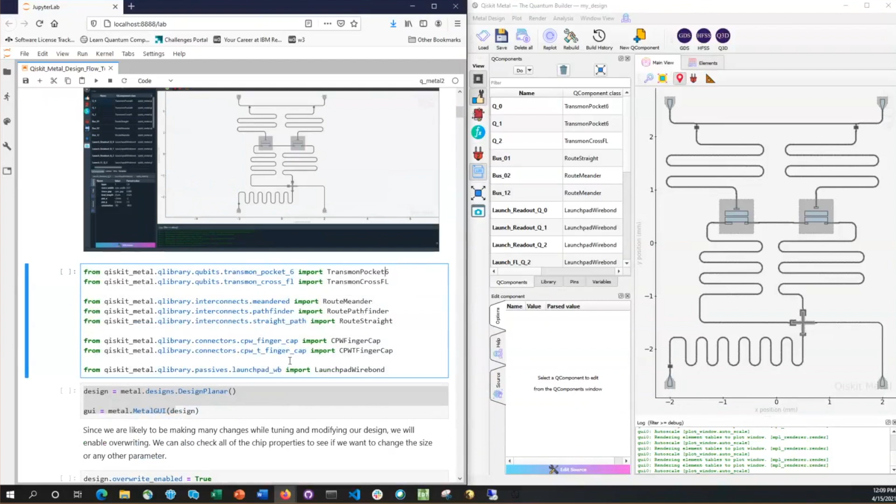So, we had generated our chip layout using a number of components. You can see the final product on this right-hand side of the screen in the GUI and an image captured in the notebook there. It's a combination of transmon pockets, crosses, pathfinder routings, transmission lines, some capacitive couplers, and a wire bond launcher.

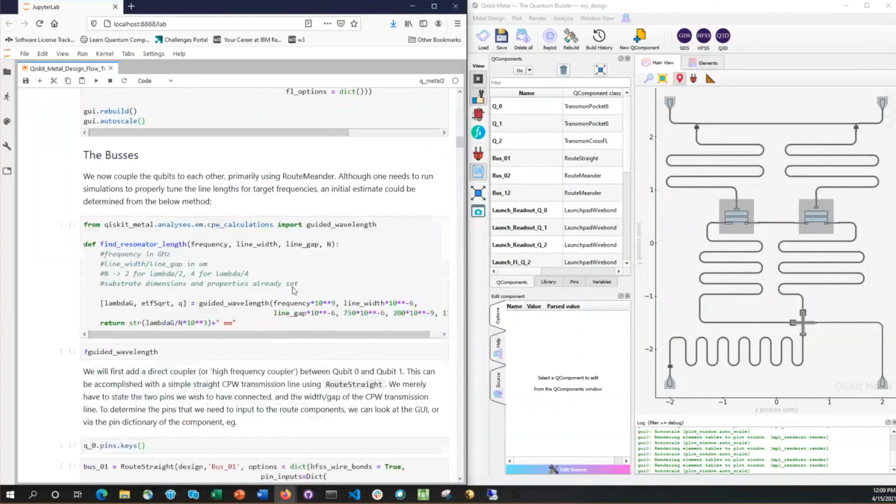So we decided what would be good initial options and parameters for setting our target quantum values that we were after, such as what kind of G did we want, what kind of readout chi did we want. Of course, these were just kind of educated guesses because to hit those specific values, you have to end up doing some kind of simulation and analysis to figure out what your layout is actually translating to. So once we had the buses with our estimated lengths, and finally all of the readout section, we were able to start getting to the simulation and analysis.

So we started off doing the LOM on a single qubit. We first were just focusing on qubit 0 over on the left-hand side here. And we were able to run it through the LOM analysis, specifically focusing on a few of those key values, such as what the qubit anharmonicity was, what's the coupling to the bus resonators, and what the readout chi would end up being. So after doing our initial simulation, we saw that none of the values were what we were wanting. We wanted a chi of a megahertz. We wanted the G to be about 80 megahertz. So we needed to make some changes to our qubit.

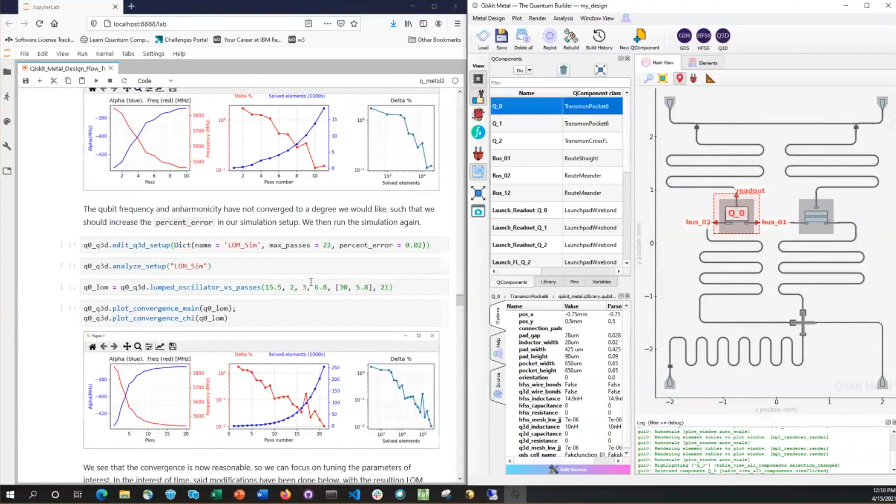So we were able to go through, improve the convergence of our simulation to make sure that we're getting good results. And once there, make the necessary modifications to our layout so that we could get the actual simulation results to show that the modifications we made to the layout were allowing us to hit the quantum parameters that we were interested in, that you can see highlighted in yellow here.

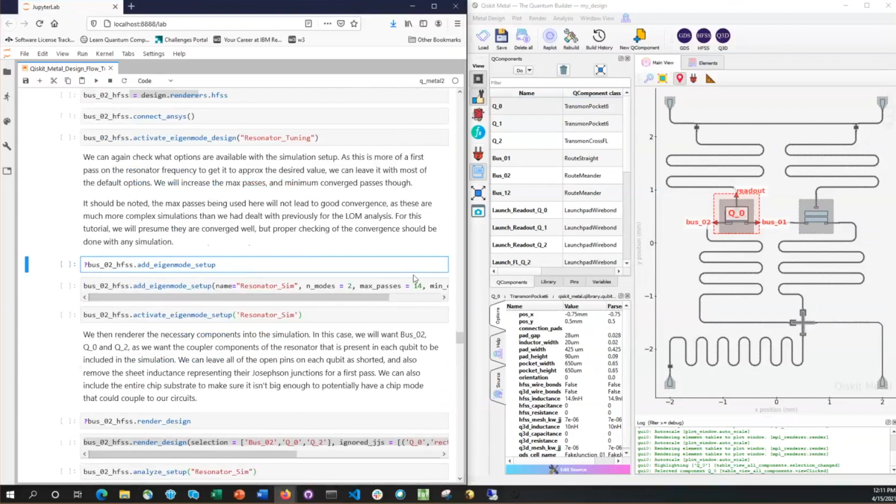After that, we jumped to looking at tuning a bus resonator. So we were doing it in a sort of first just rough approach. We were focusing on bus 02 over here. So we were doing that by just rendering in bus 02, qubit 0, and qubit 2, but just having those qubits as capacitive islands, not actually active junctions. So we did that by setting the ignored JJs to specify those junctions should not be present in the simulation.

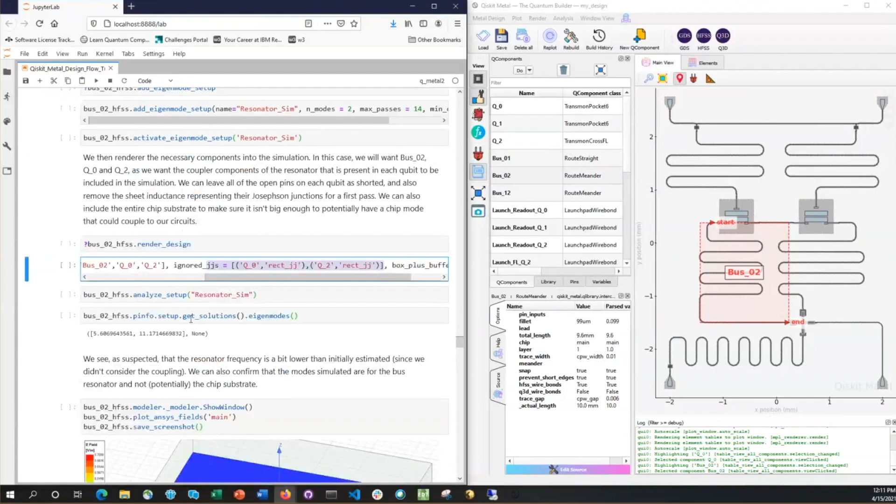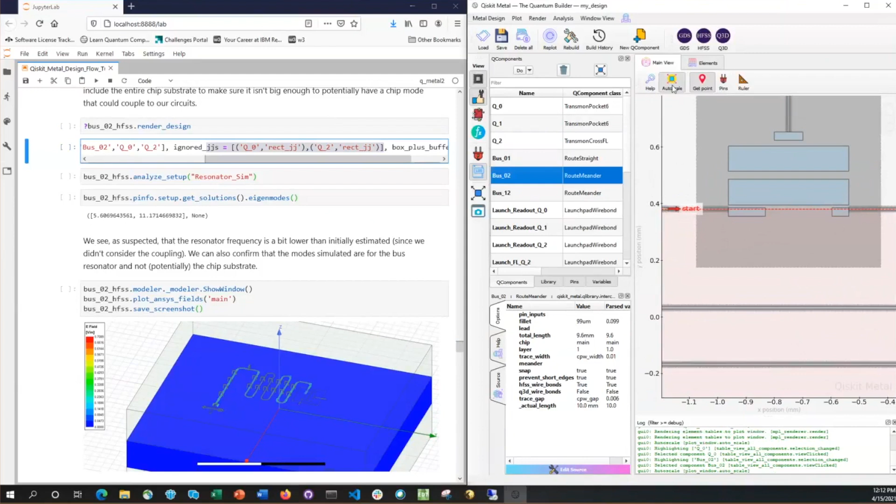That allowed us to do a much faster simulation and get the initial estimates of what that resonant frequency is, specifically because if you were to just render that resonator on its own, you wouldn't be including the coupling portions at the ends of the resonator, and your resulting simulation wouldn't give you an accurate result. So from there, we were able to determine that, okay, our length's not quite right, but really this is a slow way to go about it. So why don't we instead see about setting up a sweep so that we could check a number of different potential lengths and see what's definitely the correct one.

And if you recall, sort of at the start of last week's tutorial, I mentioned this is still very much in development. Things are progressing and changing. We're getting feedback from the users, we're finding bugs, we're improving the code. And this is one good example because since last week, the sweep methods have actually been improved. So now you can include a greater variety of options for what you want the renderer to do with open pins and also how the junctions are treated.

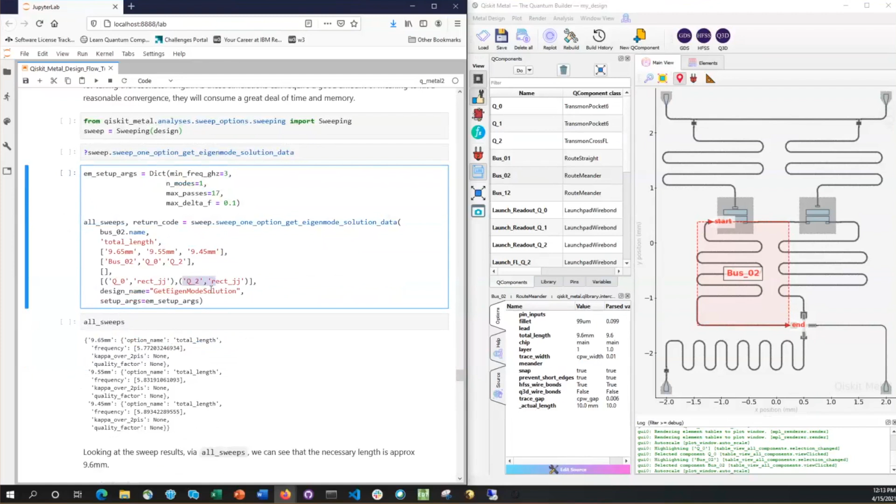So with the sweep, we can mimic how we did the previous simulation in that we tell the two junctions to not be rendered so that we're only simulating the eigenmode of the resonator. The qubits are still there for their coupling and their charge island aspect, but it allows for the simulation to be faster because it's not needing to mesh that sheet inductance and add a lot of extra memory requirements.

So from that, we're able to relatively quickly get a pretty good sweep of a few potential lengths for that resonator. If you recall, we were trying to hit a frequency for this bus of about 5.8 gigahertz. And you see from these two that roughly we'd be needing about 9.6 millimeters. So we go ahead and we just change that value right there.

Now, ideally, you'd want to, again, make that check, modify it to the length you think it should be, do that simulation and confirm your estimate is correct. But we can eyeball it for here. We're not actually going to fabricate this chip. We can kind of skate by with MacGyver methods for some of this tutorial.

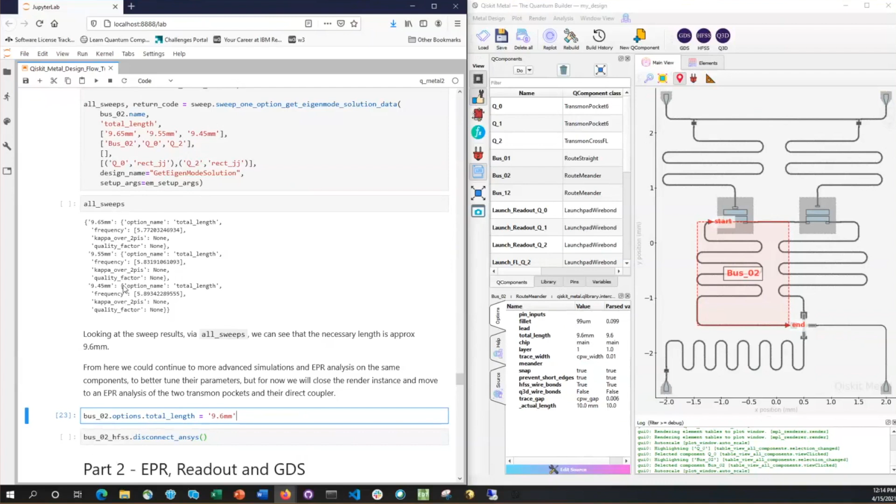So moving now on to part 2. This section might feel slightly more jumpy because, as I had mentioned, we're not going to go through every single step of simulation and analysis and tuning for the whole chip because, one, we're not actually going to make this chip, and two, that would be very time consuming, and I think many of you would get bored of my voice if we went through that whole process.

So what we will be doing is continuing to jump to specific examples that follow the design flow or a potential design flow and seeing how to make use of different tools or simulation or analysis provided by Metal in order to get yourself through that part of the design flow.

So first off, we're going to jump into EPR specifically because we want to see about tuning the coupling between qubit 0 and qubit 1. If you remember, for these two qubits, we actually don't have a bus resonator. We have just a direct coupling transmission line. So you could consider it as a high frequency coupler bus resonator, or really it's a charge island that's capacitively connecting the two.

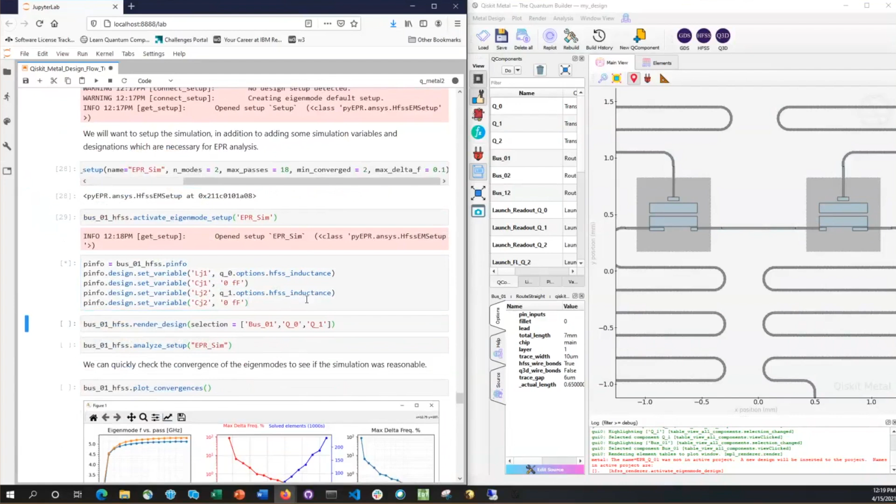You can see now for this design, we have those variables located in ANSYS. So, as I mentioned, we're going to want to render bus 01, qubit 0, and qubit 1. So we'll get that rendering in. Now, the simulation, of course, would take quite a while, so we're going to skip that.

As we get farther into the design flow, your simulations will start to take longer and tend to require greater amounts of computational memory. When you're looking at qubit to qubit coupling, that's a lot more meshing. It's going to take more memory and time. As you start looking at, say, readout chains, that's even more memory, that's even more computational time.

So it's something you want to keep in mind, especially if you're, say, working off of a laptop, as I currently am. You may need to make use of a workstation for more precise simulations, and just use your initial passes with your simpler computer as a rough estimate, and then fine tune later.

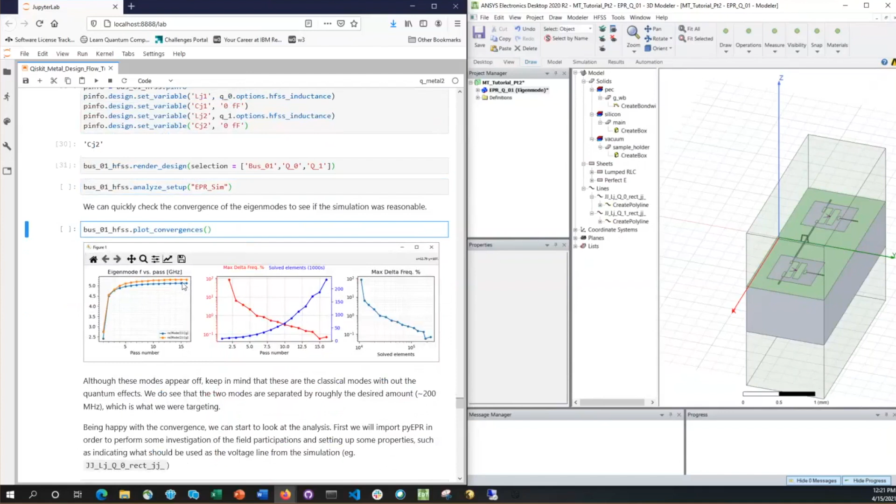So pretending that we did that simulation, and the simulation is now complete, we can check the convergences. You can see the eigenmodes seem to have settled down reasonably well. I feel comfortable saying that has converged for our purposes. Now you might notice as well, though, that these frequencies are a bit high compared to what we were getting when we did the LOM analysis. And you'll see later that that's okay.

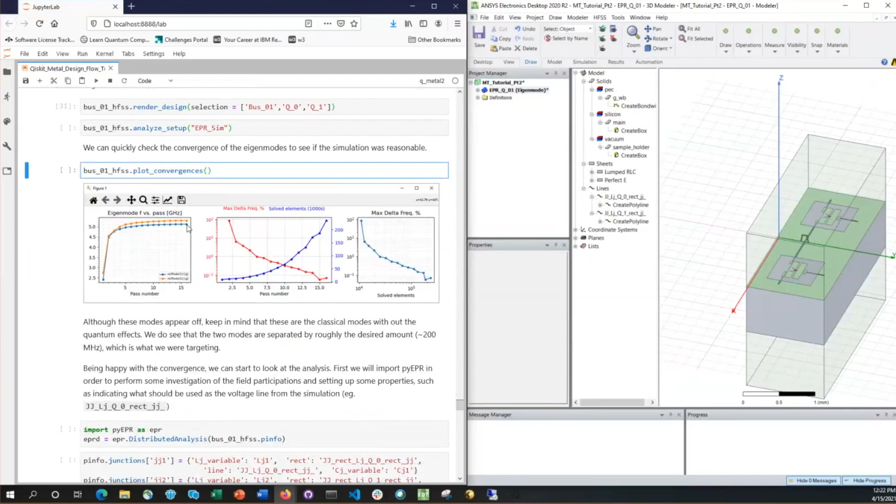Really what is important is that we're seeing that the spacing is about 200 megahertz, which is what we were designing for, and that separation is also very important when trying to look at stuff like the qubit to qubit coupling, as well as their frequency, of course. So once we've settled on being comfortable with the convergence, we can jump to actually starting some EPR analysis.

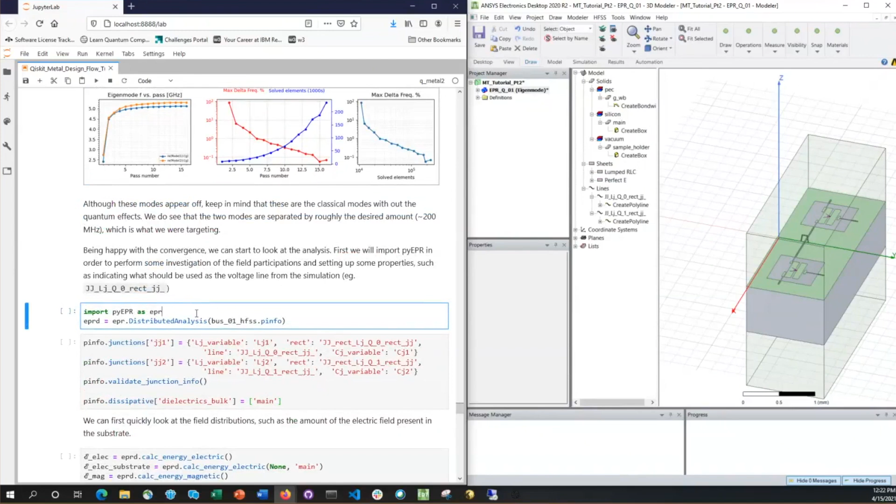So we'll go ahead and just import PyEPR in order to call it more easily and directly. Make an instance of the analysis class there. We will specify some of the junction information that has been used in this simulation. This is just important for the EPR analysis, so it knows what to look at when it's doing some of the field calculations. So for junction 1, we're telling it these variables are attached to what we're calling junction 1, as well as these shapes.

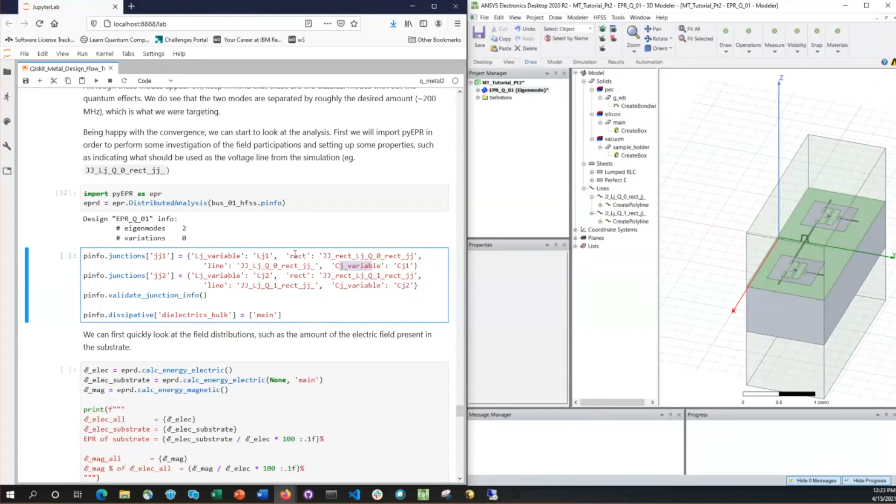Now, if we zoom in just quickly so you can have an idea, if you recall, when we're rendering into, say, an eigenmode simulation or even a driven simulation, the junctions get represented at times as a sheet inductance. So that sheet inductance has the name JJ rect underscore LJ. It's a long name, but very easily identifiable and won't get mixed up with others.

We also have a polyline that we can use as reference for, say, directing an internal port, or in this case, we will be using it in EPR for reference as a voltage line, or the voltage vector for doing your line integration or path integration. So we'll set that info, also specifying the volume, which is our dielectric, in this case just being called main, and it's just silicon because we didn't make any changes to our chip options earlier on.

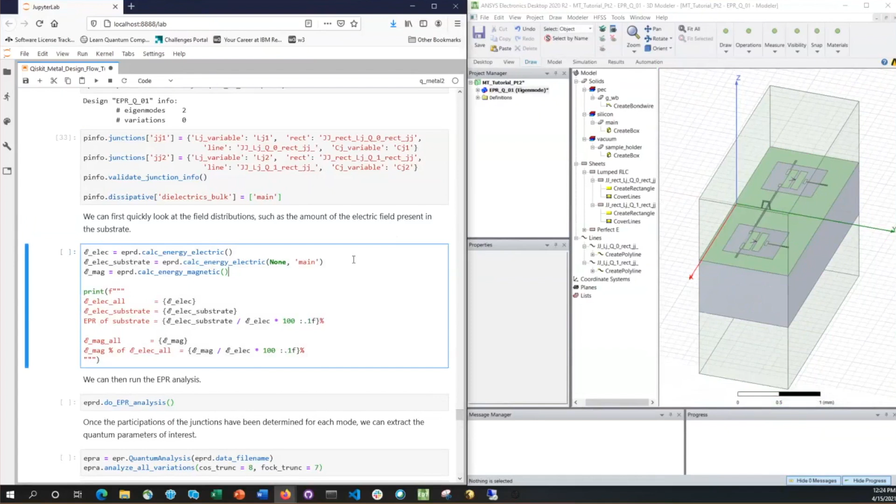We can then take a quick look at the field distributions. Oh, my apologies. Of course, it won't calculate anything because I didn't run the simulation. From those field distributions, you can find things such as the amount of the electric field that's present in the substrate versus the vacuum or air around the chip. It basically makes use of the ANSYS field calculator in order to extract any of this information that might be of interest.

Now, of most interest is the actual EPR analysis. So this I've already done. So we have this data file that gets saved, which contains all of the analysis that's been done on that field calculator.

Now from there, I can run the analysis on the variations, and in our case, we just have the one variation. So from doing the final step of this analysis, we're able to get the resulting mode frequencies, in this case from the numerical diagonalization. And you can see that when taking into account the quantum aspect of the circuitry, our qubits' 0-1 transition frequencies end up being about what we were aiming for initially.

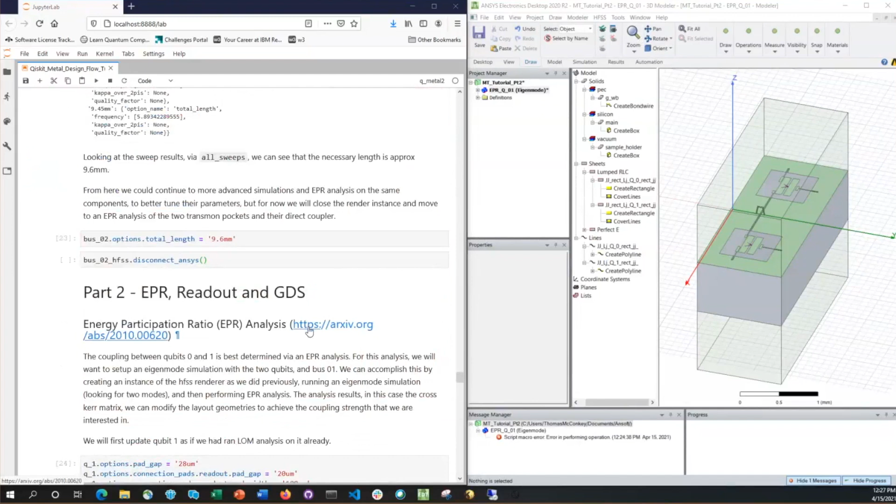Now, for the much deeper dive in terms of what that all means, we'll dive into that in much more detail for anyone unfamiliar with PyEPR analysis in a later tutorial, but I definitely would advise people to check out the paper, as that's a good spot to get started if unfamiliar with the process. And this notebook will be shared later once it's all wrapped up and finished.

Oh, a question: is it possible to simulate each component individually? Well, yes, you can. You just might not get as accurate a result. If you recall, for LOM analysis, we did simulate the qubit individually. We had to input into the LOM analysis what the bus resonator frequencies were in order to extract their respective Gs and other values of interest. But to get the most accurate result, you'll want to have more than one component simulated at a time.

For the absolutely most accurate result, you'd simulate the whole chip in one go. That's insanity. It would take so long. Someone else will have made a quantum computer to do the simulation faster by the time you're done that simulation. So figuring out the smallest subsections you can simulate and still get reasonable results and parameters is part of the intuition and practice you get as you work on these.

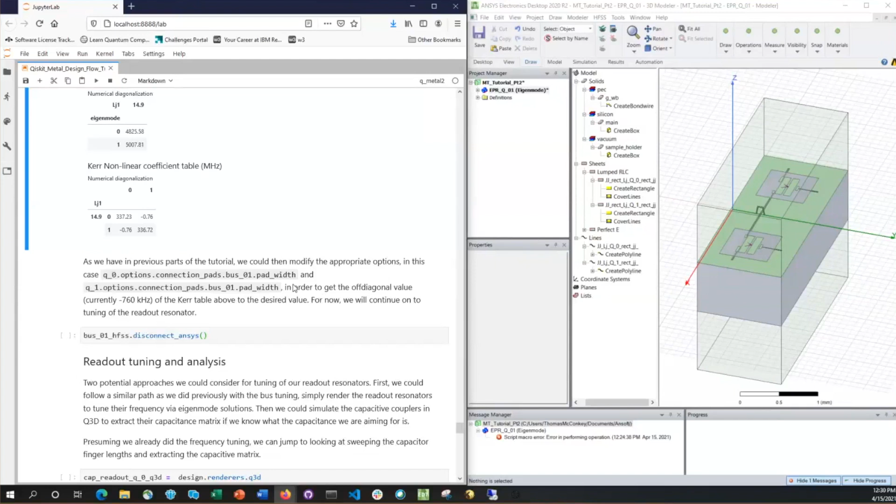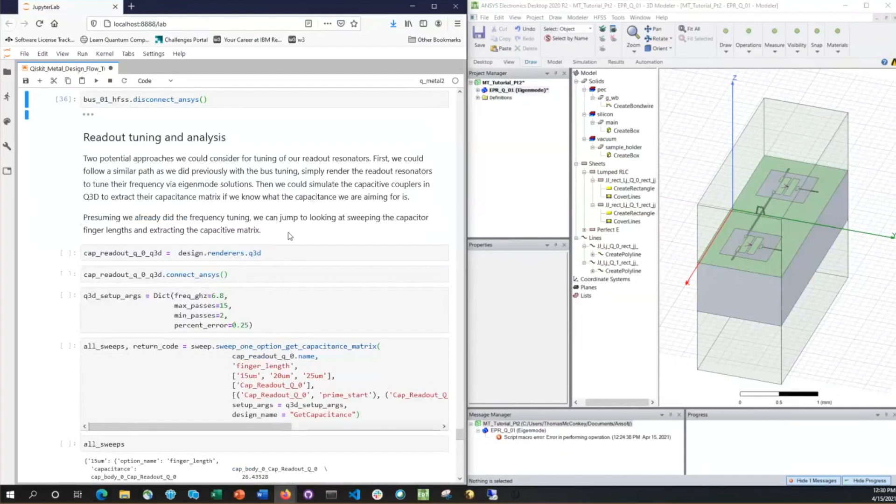So from there, finally, we would just disconnect from ANSYS to hopefully avoid that COM reference issue and continue on with the next step of the analysis. So we'll assume now that all the qubits have been tuned, all the buses are tuned, everything's spot on to what we were aiming for. Now we need to start thinking about the readout chains. So, in this case, on the north side, this transmission line, readout resonator, and that capacitive coupling.

Now, we did already do a decent tuning for the Chi with the LOM analysis on this qubit down here. But we have no idea if our readout resonator is at the right frequency. We have no idea what kind of capacitive coupling we have with our interdigitated capacitor at the top here. So there are multiple ways you could go about this. One potential option is that you know what capacitive value you want for that interdigitated capacitor.

In that scenario, we could make an instance of a Q3D renderer, then set up a Q3D simulation, specifically a Q3D sweep, so that we get multiple capacitance matrices for different geometries of this interdigitated capacitor. So what I'm thinking of doing, very similar to the sweep we did for the bus 02 eigenmode, is render just this interdigitated capacitor. I'm going to sweep the finger length, so the length of these interdigitated fingers here.

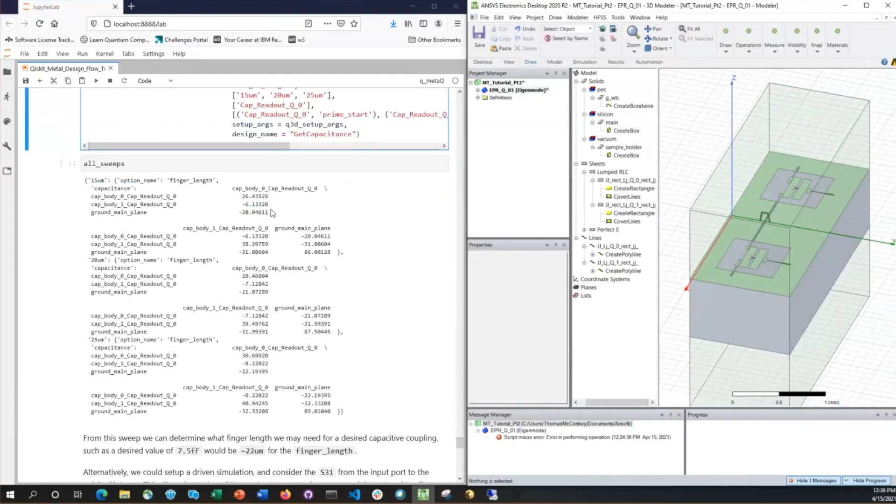So jumping back to the capacitance sweep, we were looking at that interdigitated capacitor. And we can see that at these different finger lengths, we're getting different values of capacitance. This is in femtofarads, of course. So from this, if we were wanting 7.5 femtofarads, we'd be able to say a finger length of about 22 micrometers would get us the capacitance we want.

Now, in addition to that, that's just telling us the capacitive coupling. So of course, we would also want to do eigenmode simulation on the readout resonator, say rendering the capacitive coupler, the readout resonator, and qubit 0, in order to make sure that we have the readout resonator frequency set to what we want. So you'd basically have a capacitance sweep followed by an eigenmode sweep.

Alternatively, what we could do is set up a driven simulation, looking at qubit 0. So we could throw an internal driven port in there instead of having our sheet inductance, say. We could put a port on those two launchers at the top there.

And then we could look at, say, S31 or S32, basically seeing, when we send a signal through this transmission line, at what point the readout resonator frequency is showing up, and also looking at the bandwidth of that dip or spike, if you're doing through or reflected, in order to see what kind of external quality factor we have on that readout resonator due to the coupling strength.

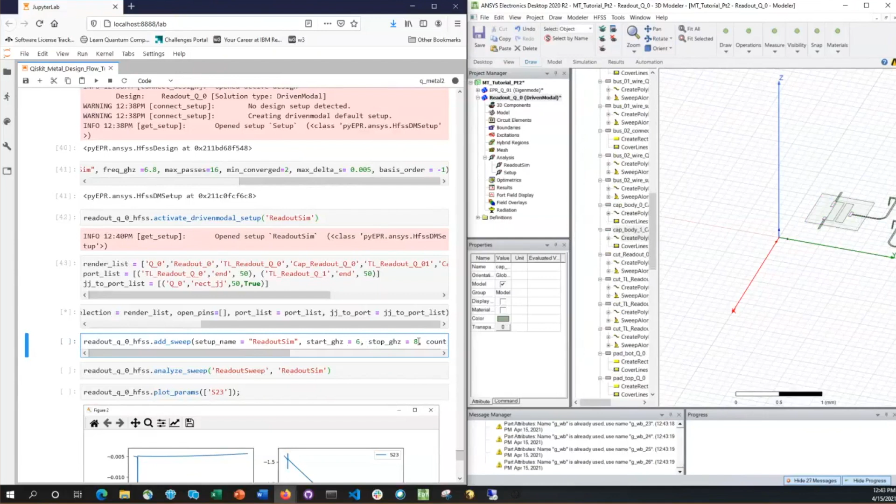Once that render is complete, you could then add the sweep. In this case, we're wanting to do, say, between 6 and 8 gigahertz. Now we know when we made the initial resonators, we were using that guided wavelength calculator. And since it wasn't including the couplers, we know that the length is going to be higher than necessary. So the resulting frequency we'll see is definitely going to be lower than what we're aiming for. So we aimed for 6.8, so we know the frequency is going to be lower than that. You could even start at 5 gigahertz, but I might have run these simulations earlier, so I was able to make sure that the resonant mode gets captured.

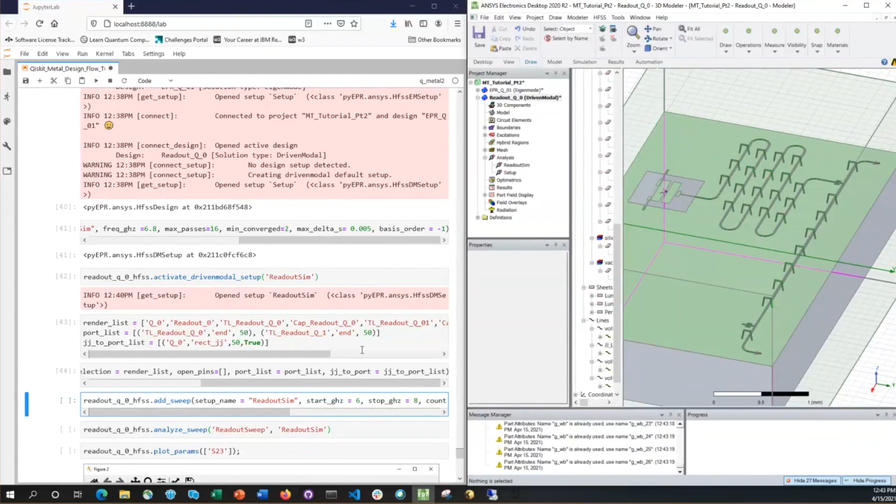So you can see here now that the resulting render is complete. We have the qubit, we have the readout resonator, and we have the transmission line, all nicely wire bonded so that we don't have any unexpected slot line modes in the simulation. So we'll add that sweep in as well. And we've also specified it to be an interpolating sweep just because we don't want to be spending too much time on an initial sweep. We then run that simulation. So when it's driven, you're wanting to specify both the analysis setup and the specific sweep you're wanting to run for that analysis.

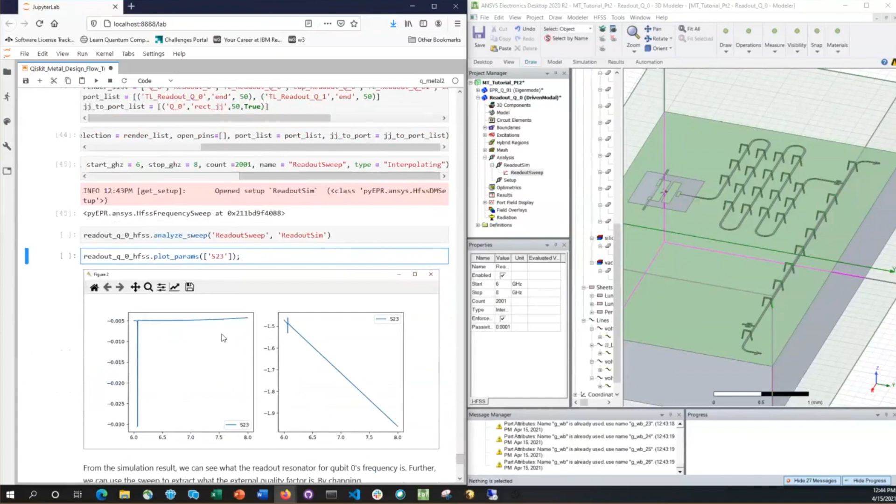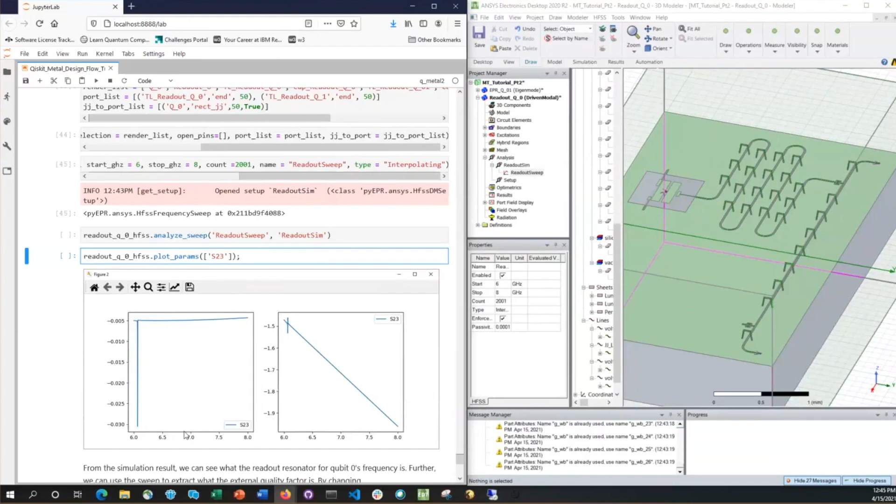Once that's complete, we can then go ahead and, say, plot the parameters of interest. So in this scenario, we see this S23. So we're seeing the signal from here to here. And we're seeing that big resonant dip. And we're even seeing that slight S phase shift thanks to the resonator here. So our resonator is much too low a frequency. So we would want to shorten this length quite a bit to get it up to the range we were considering.

And then for the actual coupling strength or the external quality factor, you could use the resulting sweep and extract, say, even just doing the simple 3 dB check on a resonator to see, okay, what's my quality factor on this resonator? Now, since we're doing only perfect conductors right now, any part of the quality factor you measure is going to be the external quality factor. So you can be confident using this as a manner to extract the external quality factor. You don't have any internal quality factor component that is influencing that result. That's within reason, because we do have that lumped port down there, but that's very weakly coupled compared to that full path there.

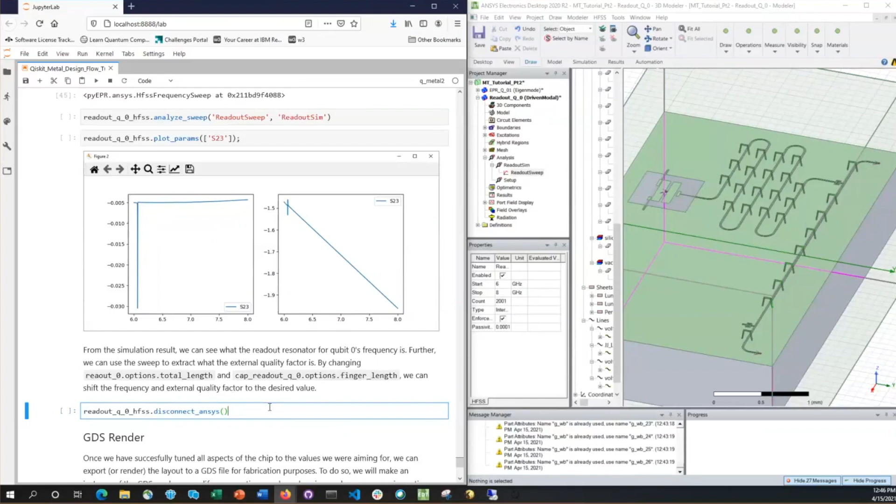So once you have that result, you can do the usual process that we've done previously, make the modifications, rerun the simulation, check it to see, okay, is it on frequency? Is that quality factor looking more like what I was aiming for? And once you're finally happy with that result, you can go ahead and make those changes and then finally disconnect that simulation.

Now, assuming we've finally gone to the end of all this simulation, analysis, and tuning, and we're set that it's like, all right, design's good. We want to fabricate it. We want to get it into our fridge and start doing experiments on it. You need the resulting design in a format that's compatible with fabrication processes. So in that case, we want to be generating a GDS file.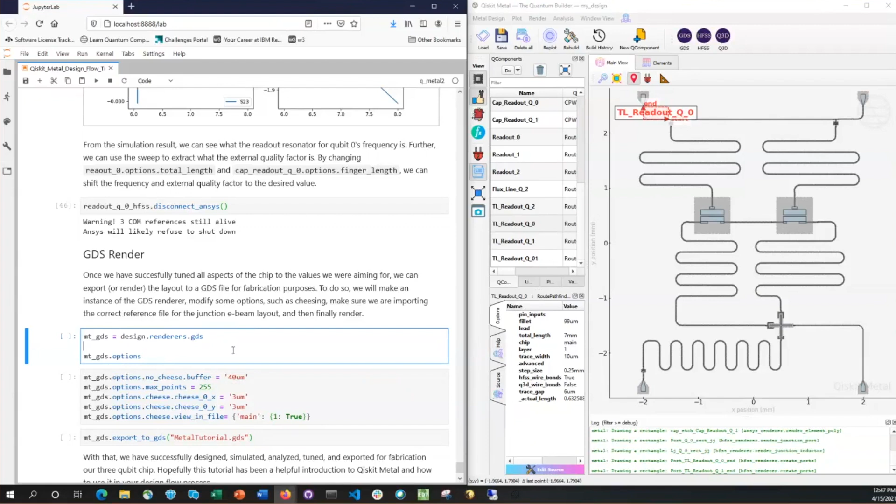So to do that, we want to make an instance of the GDS renderer. Even for an export, we refer to them as renderers because they are generally still series of Python classes or methods or API commands to actually make that connection from Metal to some external software or external file type. So when doing that, we'll make that instance and we can see all the options. Some of the options of most importance, I'll say, is the path file name.

I don't know if you recall from last week when making the qubits, I pointed out that we give a cell name that represents our junctions for when we make our GDS file. This path file name is the actual GDS file that's holding the respective e-beam layouts for your Josephson junctions. I hope that came across clearly, but maybe it's better if I explain again.

So in essence, the Josephson junction in Metal is the most variable representation component in all the design. When you're rendering a simulation, say for a capacitance matrix like Q3D, it doesn't get rendered at all. If it's for an eigenmode simulation, it will be as a sheet inductance. If it's, say, a driven modal simulation, it could be a sheet inductance. It could be a combination of sheet inductance and internal port. So in essence, it will modify the most out of any other component to match what's necessary for the simulation, but also for actual fabrication purposes, you want the real e-beam layout.

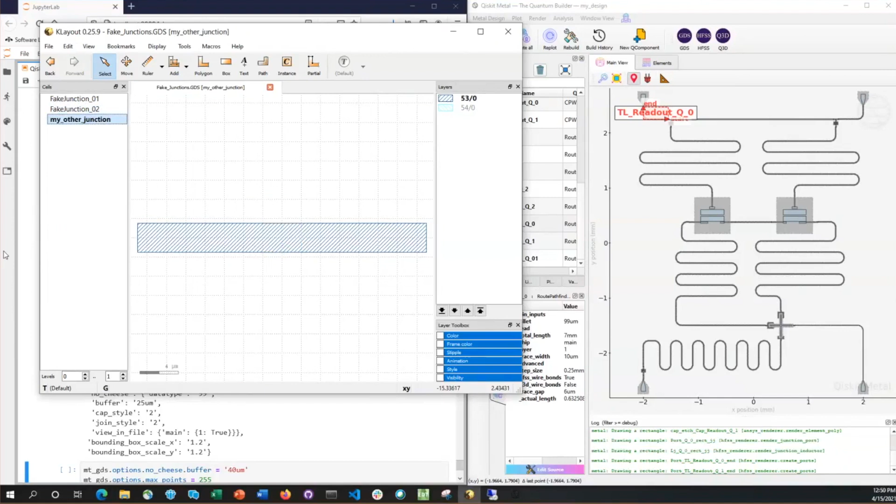So a quick example, this is that fake junction.gds file. And you see here, again, emphasis on the fake junction, but you see a series of cell names of just different random sketches. And these get referenced for the component to know, all right, this is the junction e-beam layout I need for my GDS file. So this file is pointed to. We know from previously what those components have in their junction cell name, but we can still take a quick look here. And we see it right there, fake junction 01.

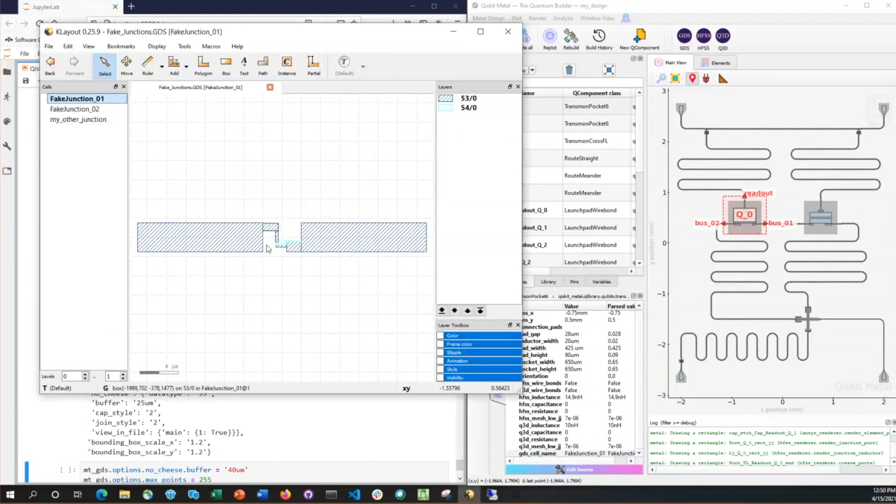So we know then that this e-beam layout, when the GDS is rendered, will be inserted where the junction is indicated, rotated and translated so that it's at the appropriate location. If this cell is too short, say that the gap here is just too large, and that's determined based off of the size of the junction that's drawn by the component code, additional lithography gets added to make sure that there is overlap with your e-beam layer here and your lithography layer here.

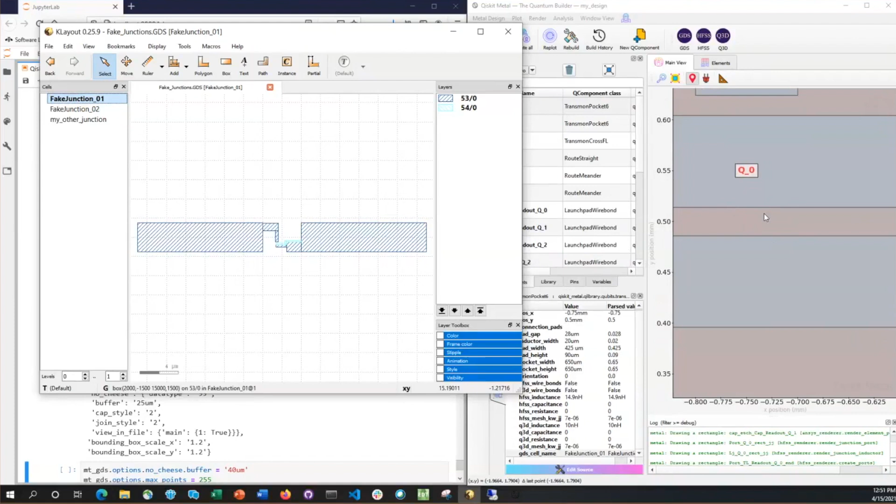The other recently added component to the GDS options that's interesting is cheesing. For anyone unfamiliar, it's just referring to vortex pinning sites. It's a common practice to add that to your ground plane as a way to try to mitigate flux noise and help avoid noise from vortices traveling around and such. So you can specify some options for your cheesing, such as the shape type, the size of them, the resulting grid size, as well as around your components, you can specify a buffer region that should have no cheese present.

So we're going to make some slight modifications of these just to meet what I randomly decided I wanted them to be. And then just go ahead and make that GDS. Now, here, I just need to pull up the file now quickly. Now, the format of that GDS, wait, that's weird. There we go.

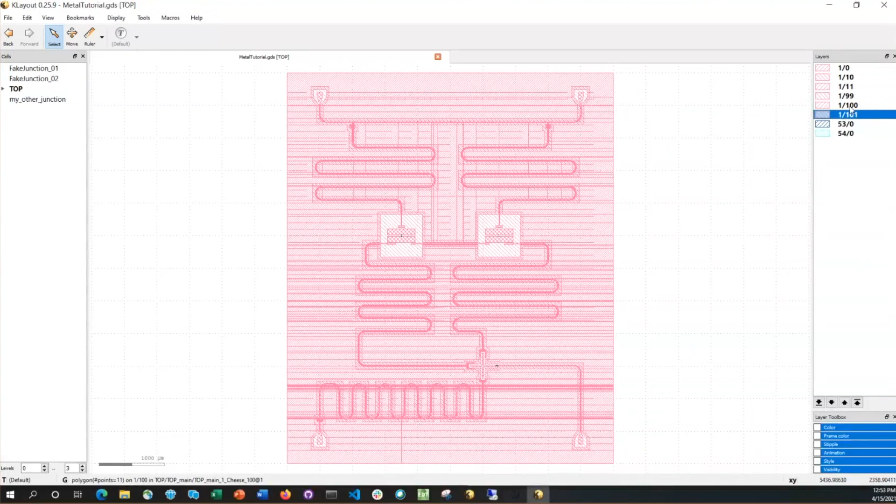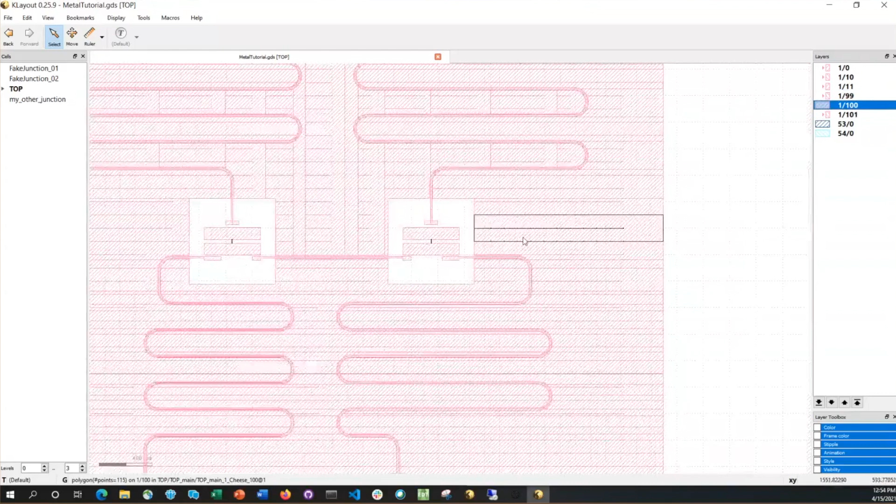Let me get rid of these, go through them. We can have the isolated ground plane. We have just the polys, the paths, the actual cheesing shapes here, and then the actual final GDS, which includes that cheesing. And as I was mentioning, you can see the respective, in this case, fake junction E-beams present where we were expecting them to be.

Finally, at that point, you're done. Well, no, you've really just begun, because now you have to actually get it fabricated and made and then put in your fridge and run the calibration and do all your experiments. But you've gone through an important and previously much longer process step for getting your quantum experiments started.

You could see that what would have taken me and many others in grad school years ago weeks, if not months, can take on the order of a few days. Even shorter if you have a really good system for simulations. So although still in progress, still in development, still buggy, it is still able to give a much faster turnaround time with respect to designing new and experimental quantum chips and getting those from your drawing board to your clean room and fabricated in a fraction of the time previously.